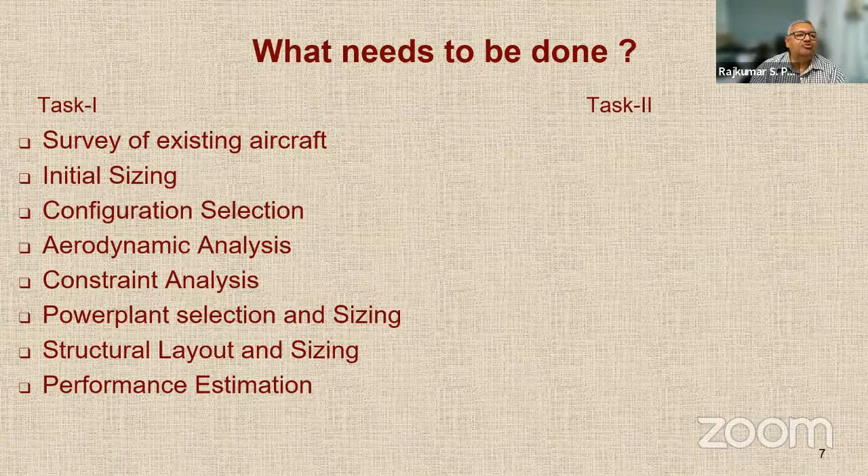After this, there will be a filtration round. Your reports will be evaluated by a team of experts so that only the very serious and committed teams can continue. They will then be asked to do task number 2, which is part of conceptual design but in much more detail. We want you to look at the propulsion system in more detail because this is a very specialized design. We want you to look at the structural design. Important things are cabin design and looking at the communication system. All these things are already mentioned in the problem statement, but we have just tried to put it into 2 tasks here.

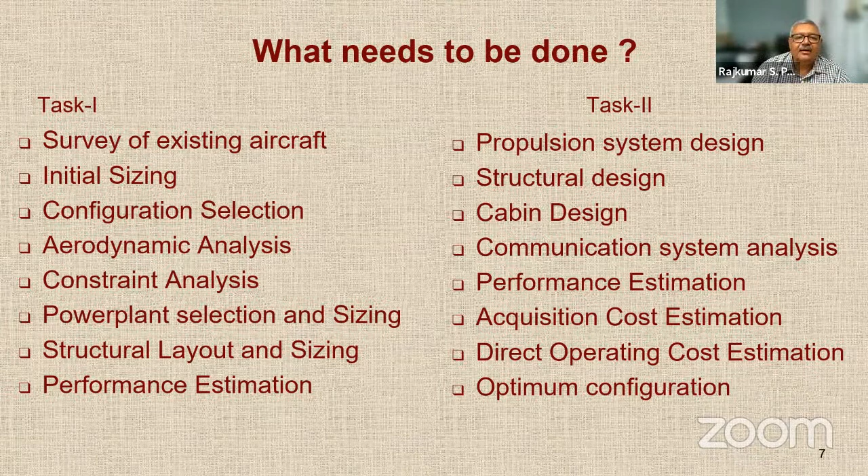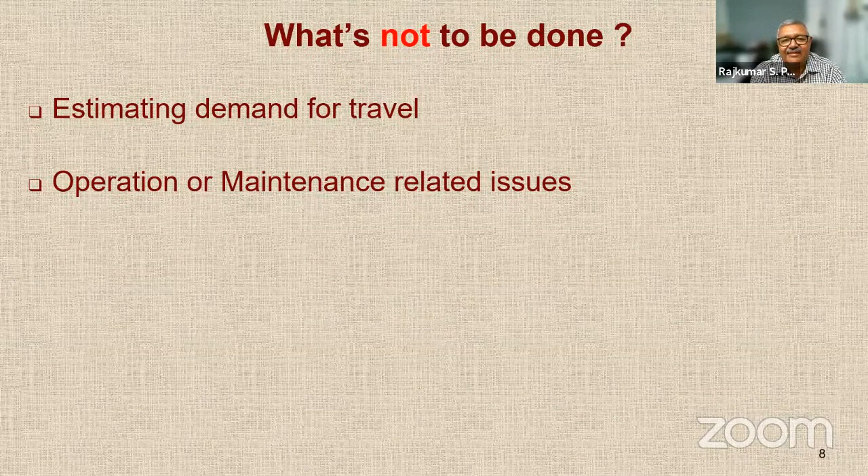Now it's also important to know what is not expected to be done, because if you do this you are going to just waste your energy and time, and you will not get any credit for that in our evaluation. For example, estimating the demand for this particular requirement, issues related to operation or maintenance, discussing maintenance cost, maintenance procedure, etc., or what operational scenarios you will operate in. Scenarios you might include, but operational details are not needed. Then what kind of profit or loss will be made by this particular service, what is the indirect operating cost — all these things are not expected to be done by you.

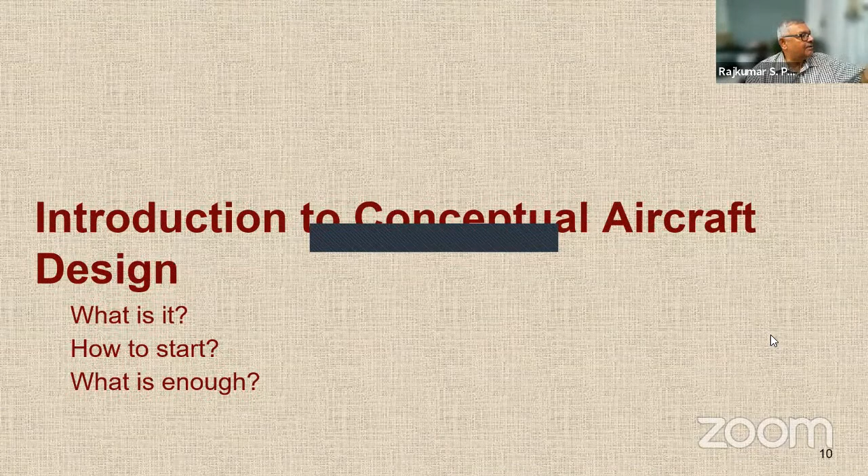Okay, I'm going to talk to you very briefly about aircraft conceptual design, what it is, how to start it, and what is enough for it.

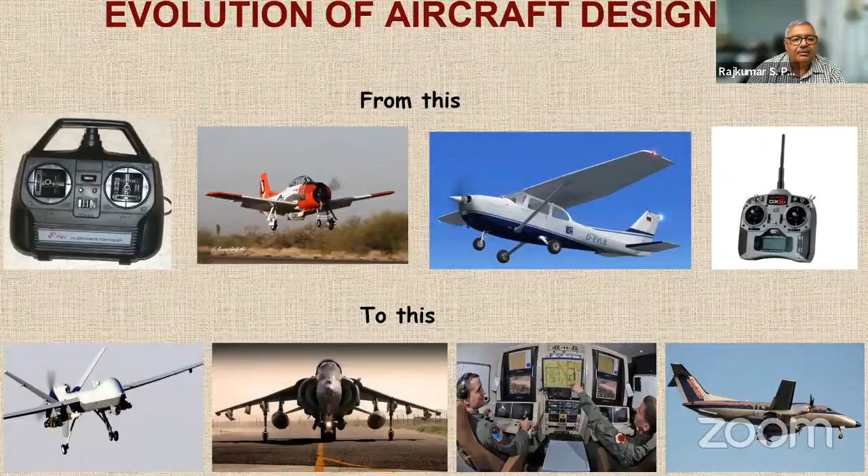What is aircraft design essentially? Can somebody tell me? Anybody in the audience can speak out. What exactly is aircraft design? What do you think? And when I say aircraft design, I actually mean mainly conceptual design. But what do you think it is? Anybody?

So guys, let us not make it like an aircraft which comes to meet the... so the aircraft which meets the mission requirements. Everybody should just say their name before they speak. Norman, of course, I know you. So what did you say, Norman? Once again, loudly. Aircraft design process leads to the aircraft which fulfill the mission requirements. That's all. Anything that meets the mission requirement is a good aircraft design.

No, that is not the required aircraft. Just meeting the mission requirements is not enough. You have to meet the customer specs and airworthiness requirements. And also it should be something which is less expensive and easy to produce in large quantities. That is inherent in aircraft design. Although in this particular problem, we are not asking you how many quantities you have to produce. We are not asking you. But in general, it should also be easy to produce and less expensive.

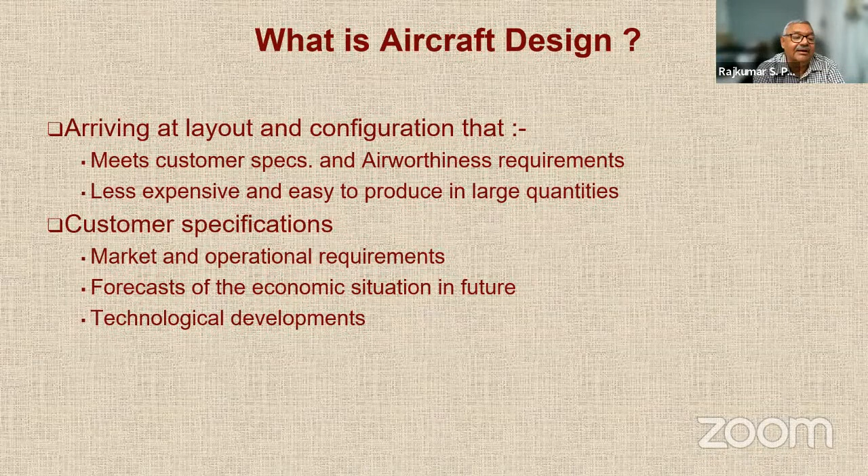But there are also some airworthiness requirements which have to be inherently fulfilled. So we will not be listing those requirements. We expect you to yourself decide what requirements from the airworthiness table are going to be required and inherently show that you are meeting those or complying with those requirements. So please note, in the problem statement, we have only given the customer specifications. We have not specified the airworthiness requirements proactively or exactly. You have to figure out then yourself.

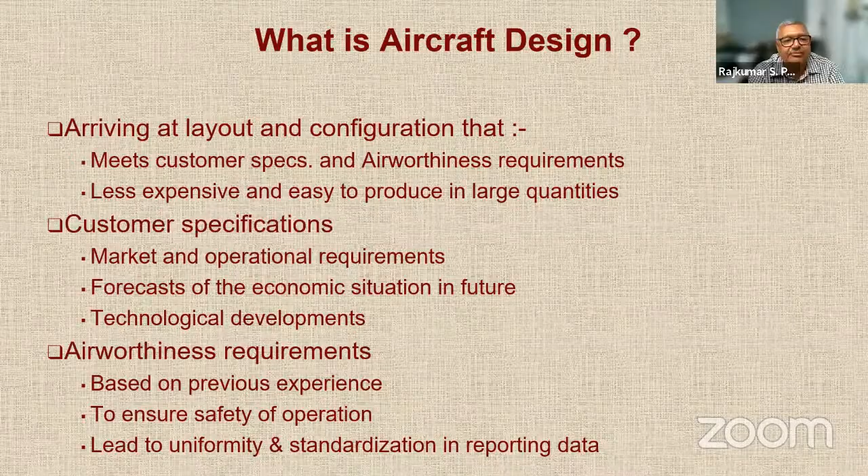Aircraft design is done normally in some phases. The first phase is called the conceptual design, in which the main aim is to ensure that it is feasible and also to identify which requirements are most important that drive the design. We are requested to carry out what is called initial sizing and the configuration and layout, and also estimate the component masses, performance, and cost.

Conceptual design stops when you freeze the configuration and then start looking at some detailed numbers in the preliminary design. There you are ensuring that the design can actually be realized. You go to the nitty-gritty, you look at the mechanical and structural concepts to be developed, and you develop detailed test and analytical database using wind tunnel testing, detailed CFD analysis, or any other system-based tests.

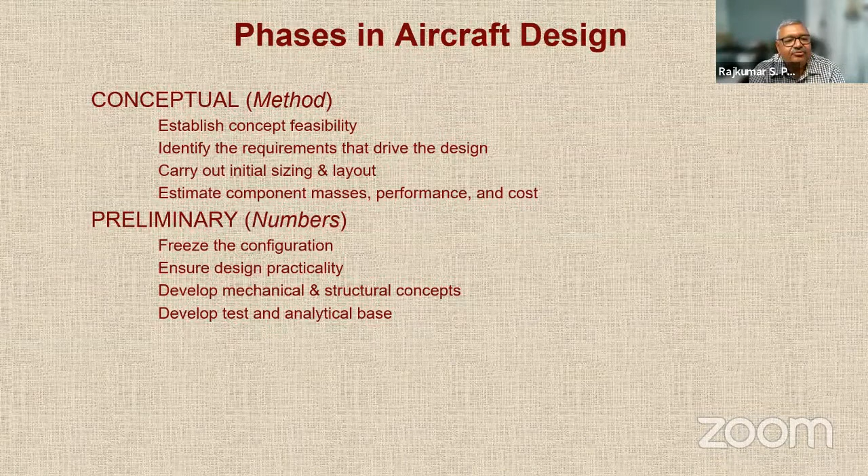Once you do that, you are now ready for fabrication. So you go for detailed design, where you do the nuts and bolts of design. You design individual components: wing, fuselage, tail, landing gear, instrumentation system, etc. You develop the process to fabricate this aircraft in large numbers. You test all the major items and you finalize the weight and performance estimates.

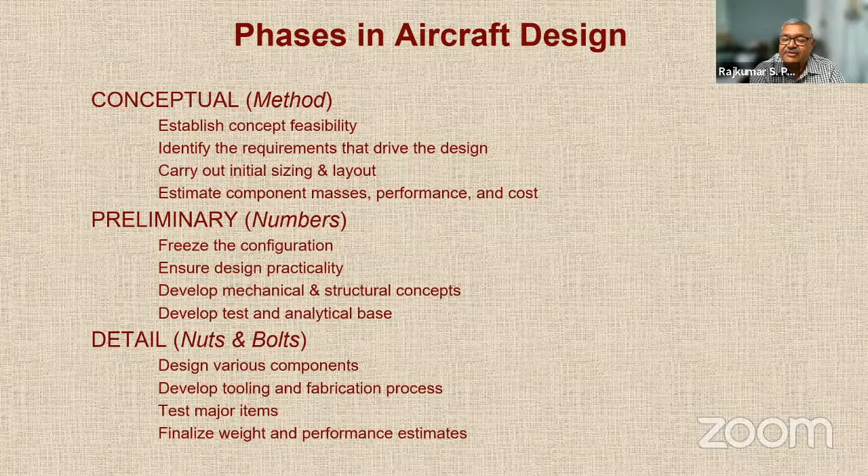So now I have a question to all of you. What is required for NACDeC-VI problem statement addressing? People can unmute themselves, mention their name, and tell us what do you think is needed. Yes, I'm Tanisha, and I think required for NACDeC-VI...

Sorry, what is required? Conceptual. Conceptual design. Yes. Okay. Right. Anybody else would like to differ with the opinion of Tanisha?

All of you, I'm sure, have read the problem statement, so you know how much detail we have to go to. Conceptual design and sizing. So where do you come to the word sizing? It's a part of conceptual design, right? So tell me, conceptual and preliminary and detail, or only conceptual - tell me among these three how much detail you're expected to go in this competition.

Anybody else can answer? So Namanuddin this side. Yeah, conceptual design in task 1 and preliminary in task 2. Okay, anybody else?

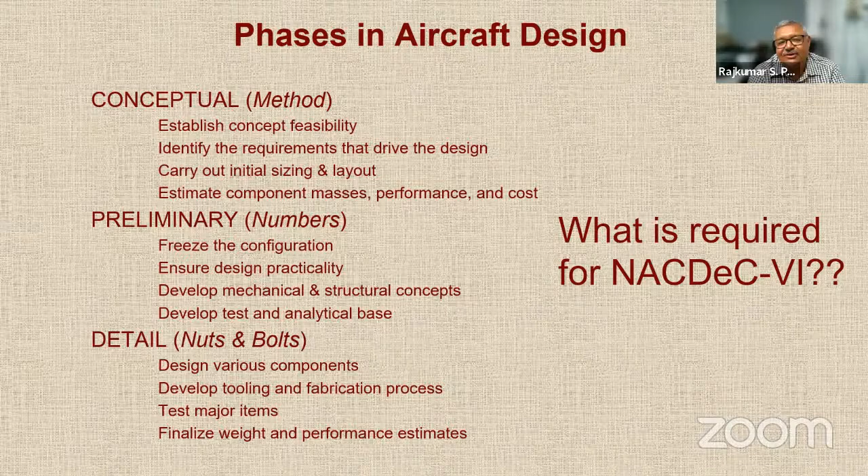This should be considered as part of the aircraft design, conceptual design. You don't need to do preliminary design in this particular competition. One simple reason is the name of the competition itself is National Aircraft Conceptual Design Competition. All the activities listed in that problem statement, you may think they constitute preliminary design, but no, they are all part of only conceptual design. It is just that we want you to go into more detail.

We want you to do a more thorough conceptual design. So we have made the problem statement in two tasks, and these two tasks are essentially coming under the same idea of conceptual design, but you will not be expected to do preliminary design in this competition. So it is very important for you to realize that you are not going to work on anything beyond conceptual design. Is it clear? Yes, sir. Okay, great.

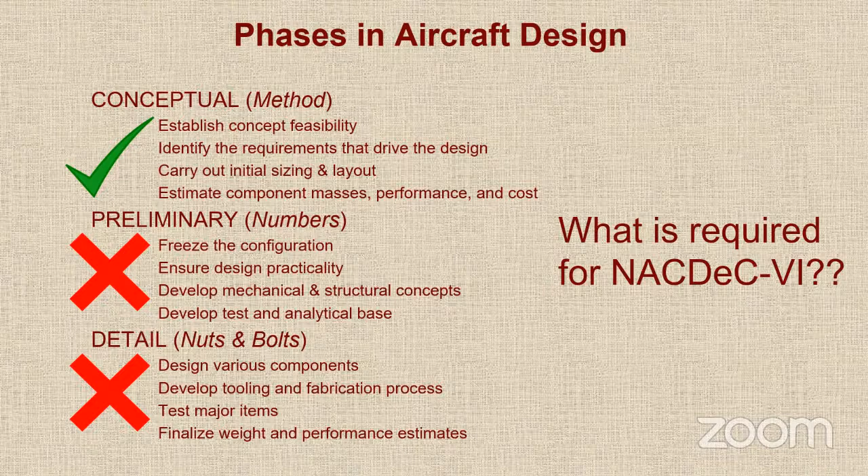Let's go ahead. So the first aspect in aircraft conceptual design is initial sizing. In initial sizing, we have to estimate the takeoff gross weight of the aircraft at the beginning of the mission profile for which you are designing it. That is the task of initial sizing.

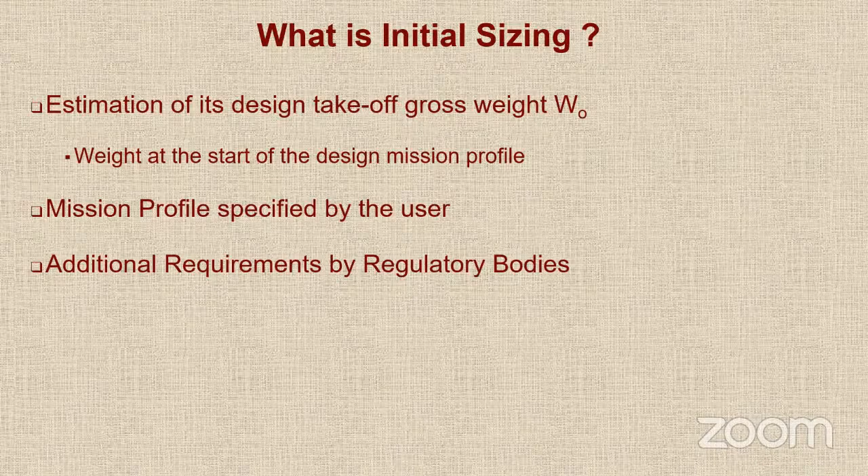This is specified by the user. We have already given you a mission profile in a way. We have given you the requirements, and those requirements can be used by you to create the mission profile. As I mentioned, there are some requirements you have to consider by the regulatory bodies. The objectives of this exercise are: first, by doing initial sizing, you get to know which requirements are most important, which are driving the design, and also you can get a first estimate, a gross first estimate of the gross weight. That's all the output of initial sizing.

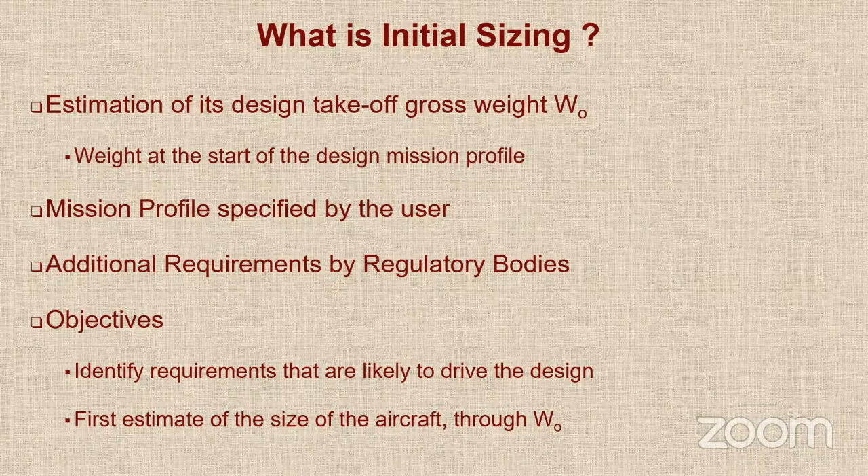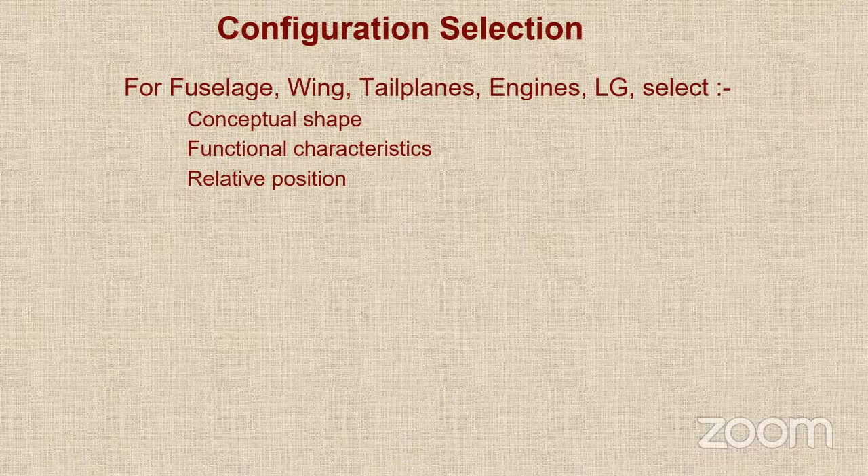Then the next activity is configuration selection, for which you have to look at the conceptual shape, the functional characteristics, and the position of various components of the aircraft, whether to have a wing or no wing, whether to have a tailplane or no tailplane, what kind of tailplane, what kind of wing, are you going to put rotor, propeller, or wing—all that decisions. These are some of the aspects which drive the configuration selection.

Mainly it is the functional requirements and safety and reliability. But many times, depending on the type of propulsion system you are forced to use, depending on the technology that is available, you have to go accordingly. And sometimes you also go by history, style, and passenger appeal, although it may not be that applicable in this case, but in the broad sense it does matter. You look at what people have done in the past and try to draw some inspiration from them.

Remember that as a team, you cannot say that we have decided one configuration right in the beginning and we are going to do it. You should definitely have a few configurations in your mind which will be investigated by team members, either in a group fashion or individually. Finally, you have to give reasoning that we have abandoned concept A, B, and C, and we have kept concept D, or it could be more. But if you say we began with this configuration right from the beginning, that means you have not done configuration evaluation at all, and that will go against you. So we want you to look at a few configurations and then choose one.

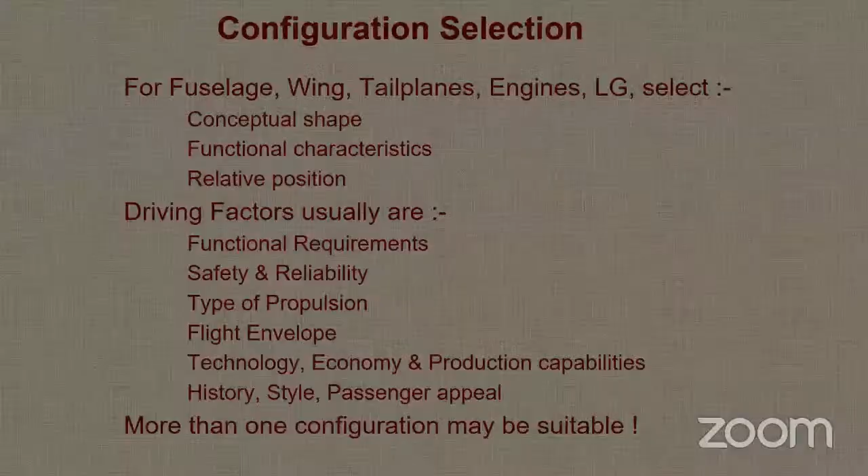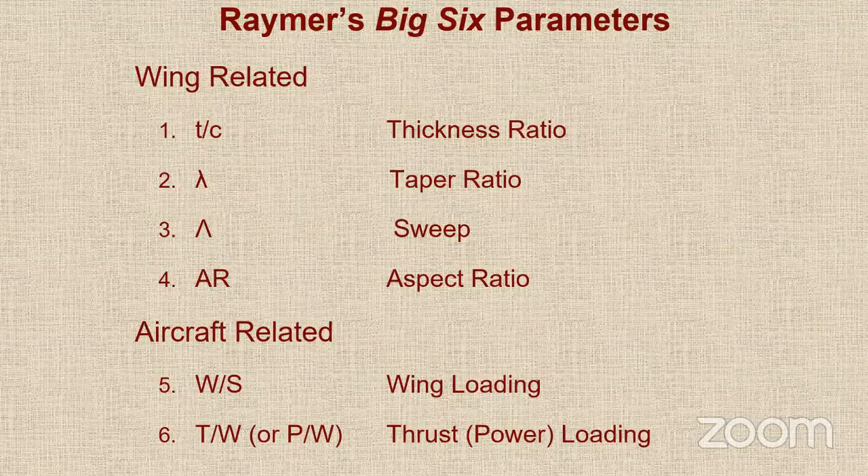The importance of the two parameters, wing loading and thrust loading, is that they appear in many performance equations. For example, many of these may not be relevant to you, but if they are relevant, then W by S and T by W are going to be used for both.

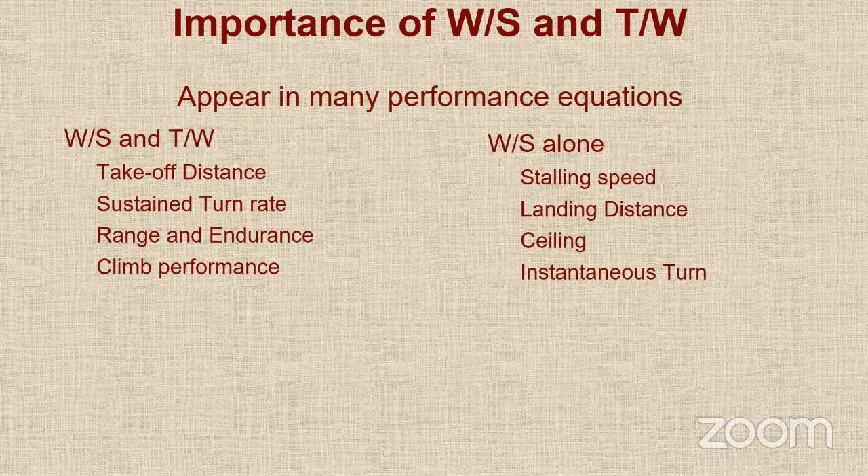Then there are some requirements which will be driven only by wing loading, and there are some requirements which are driven by both of them.

Any questions you have regarding the aircraft design process before we go ahead quickly?

We'll go ahead then. Now we come to air ambulance vehicles, the one which you are going to look at for the next several months. If you look at the literature available online, you will find that there are many companies which have tried to address this problem of air ambulance.

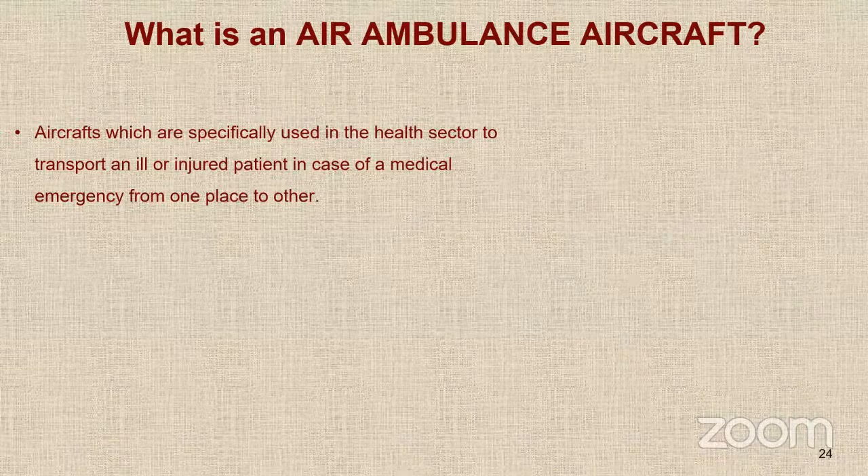Basically, this is an aircraft which is used in the health sector, and our aim is to transport an ill or injured patient from one place to the other. The patient could be under the civilian environment or in the defense requirement, it doesn't matter. So what are the benefits? The faster you reach a person, the better is the chance of survival. 10 minutes, 15 minutes is considered the golden period after an accident or incident.

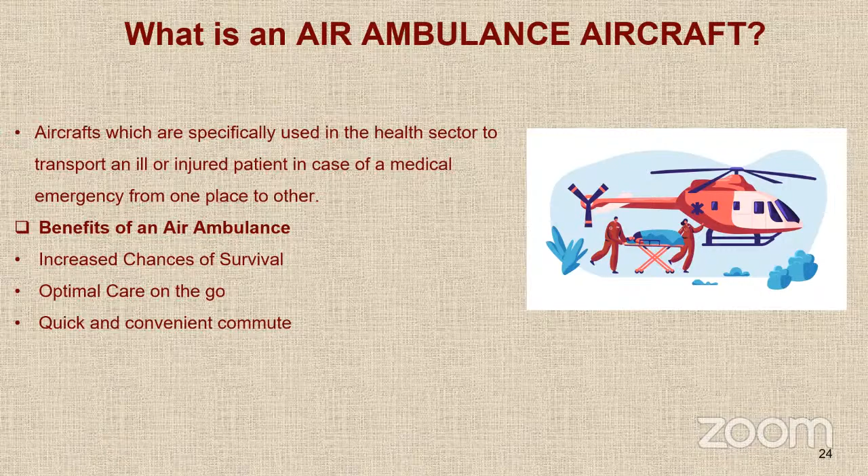Then on the go, you can give some optimal care. There will be one paramedic on board who will try to look at the important parameters of the person, give some immediate first aid, etc. We don't want people to travel by conventional modes of ambulance on the ground because you can get stuck in traffic, as you all know. So we want to give you a quick commute within the city or in a remote area. It will give a fast and wide coverage.

Now, we'll give you an example of a helicopter which has been very popularly used for air ambulance. Remember, this competition is not limited to only helicopter. We are not saying that you should design a helicopter, but we'll try to show you a small video.

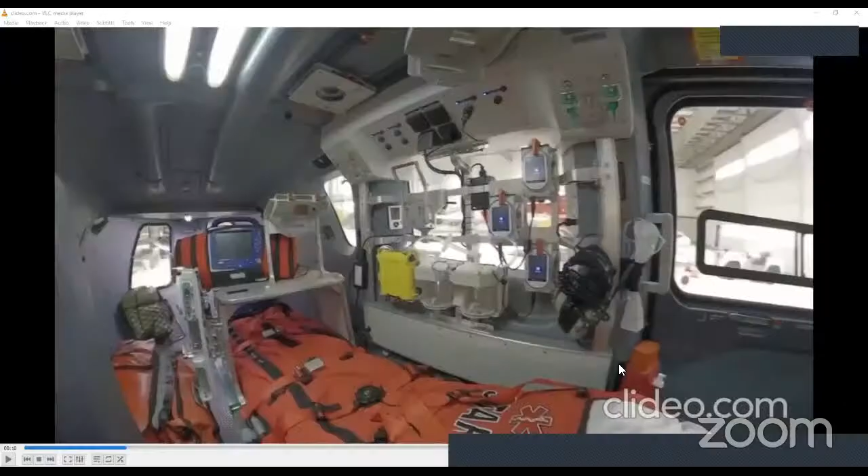As you can see, we have a very spacious cabin, which is a custom installation by Aerolite, as well as leading edge, future-proof medical equipment. I can't emphasize enough how much we appreciate the support of our allies in allowing us to do this and care for these critical patients in the back. In fact, I just finished transporting a patient on this very stretcher, and they had a good outcome because of the ability for me to get to that patient and truly provide the care they required.

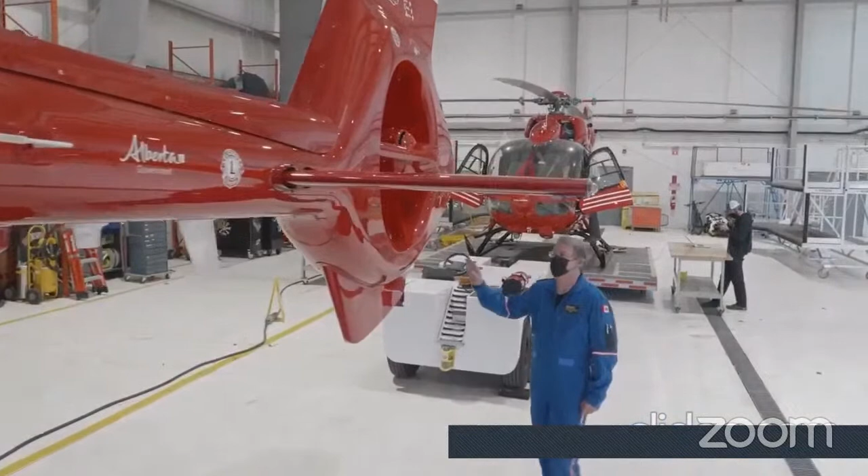So let's head to the tail of the aircraft, and I think John wants to talk about a few things there. One of the new modern features of the H145 is what's called the fenestron. Instead of a conventional tail rotor, there's actually a tail rotor inside this shrouded environment here, which increases safety when we're operating around the back of the aircraft.

But the aircraft's still incorporated with the same clamshell style doors. As you can see when I open them up, they're huge. They allow us excellent access to the back of the aircraft for loading and unloading the patient, as well as our equipment that's secured over on the side.

I can show you how the stretcher works here. It's a single person, no lift stretcher. And what this does is it allows us to safely transition the patient out of the helicopter and into the receiving hospital. They might be hooked up to a ventilator, monitoring equipment, blood tubing, multiple infusions, and that's all secure.

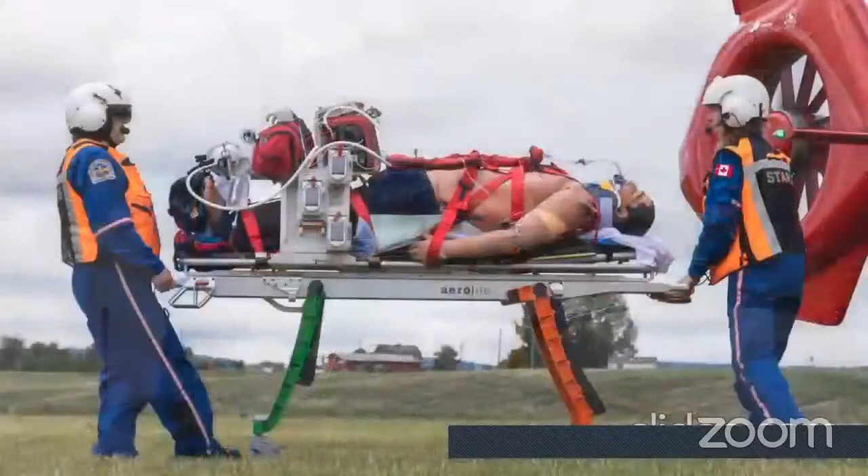So this is one example, just one example of a dedicated vehicle. Okay, but this is a helicopter. Now, what is the problem in using a helicopter for this particular mission? Just a helicopter? Why not design just a helicopter? It has a very large size and a great downwash, so difficulty in landing and difficulty in using in every location where it is needed. No, but helicopters are much more popular than any other aircraft because their selling point is they can land on helipads, they can land on grounds and fields.

The thrust vector of the helicopter is not forward. In cruise conditions, we will need better aerodynamic efficiency, so the power consumption for a helicopter will be much more than the aircraft. The speed at which you are supposed to fly is quite high. Helicopters do fly at that speed, but they are very, very expensive. Correct? Right? They are very expensive.

Also, a helicopter is very difficult to maintain because you have the rotor that does everything - it does the forward motion, it gives the lift also. So it becomes a very complicated mechanism. You have a swash plate type of mechanism, etc. So helicopters suffer from very high operating cost, high vibration levels. They also have much more complicated powertrain because you have to connect the main rotor to the tail rotor in unison, etc. So these are some of the reasons why helicopters can be limiting.

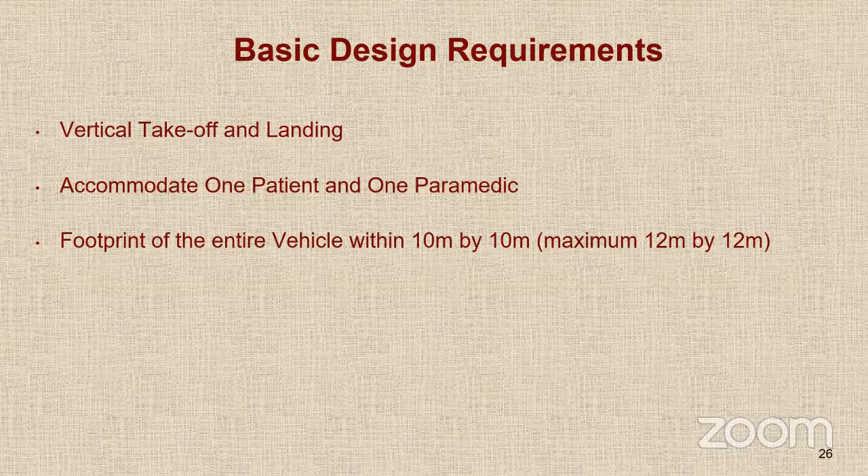Okay, we should operate it in India, so you have to look at ISA plus 15 degrees centigrade conditions for operation. Don't work under ISA conditions. It should be fully autonomous with no onboard flight crew. This is how it is mainly different from a conventional helicopter.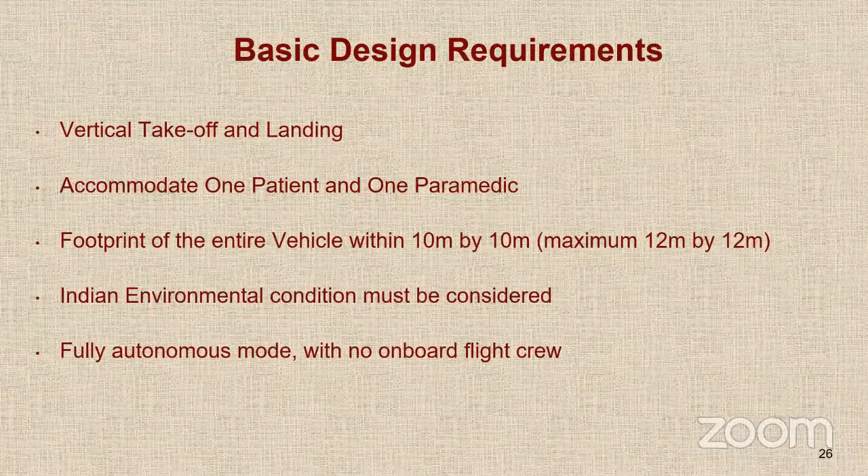Regarding autonomous mode calculations, we are expecting that only in the second stage, some information there, not necessarily much information in the first stage. These are the mission requirements which all of you are aware of.

We are assuming that the total weight of the passenger, the patient, and the paramedic is 170 kg. We want it to travel 100 kilometers at 120 kilometers per hour cruise speed. The passenger cabin volume should be at least 9 cubic meters. Minimum requirement for length, breadth, and height is given; you can have it more than this, that is better, but not less than this. There is also a list of equipment available in the problem statement.

Now, yes please, somebody wants to ask something. Krishnakant here. I had a question about range. It's mentioned 100 kilometers. So is 100 kilometers till the patient, or the whole mission, from hospital to the patient and back? What do you think?

It should be till the patient. Agreed, till the patient, from the hospital to the patient. We want to cover a radius of 100 kilometers. Any passenger within 100 kilometers range from the hospital should be picked up. Good question, thank you sir.

Any other query regarding the mission requirements? So sir, is it 50 kilometers one way? No, it should go from hospital to patient, then patient to hospital. No, it is 100 kilometers one way. Just now I clarified that we want to pick up any patient within 100 kilometer radius.

So it is not fixed at the location where the patient is. We have to operate our vehicle from any of the hospitals, then go to the patient, then count the distance as 100 kilometers from patient to hospital. Is that the case? Yes.

But what about the distance we cover from hospital to patient? That is 100 kilometers max. If your patient is at 10 kilometers, you have spare capacity. You should be able to pick up anybody from a hospital which is 100 kilometers away and bring that person back. So assume the radius of action is 100 kilometers.

Sorry to interrupt, sir, Krishnakant again. About cruise speed also, can you please clarify? Is it max 120 kmph, or should it minimum go by 120 km? There is a meaning of the word cruise speed in aerospace engineering, you don't have to ask me this question. Cruise speed, maximum speed, stalling speed, they all mean something.

So this is not the maximum speed, this is not the stalling speed, this is the cruise speed, design cruise speed. Thank you sir, so continue with that. So is this fixed? You are defining 120, so we have to take it as 120? We cannot exceed or go beyond in cruise?

When you have a cruise speed of 120 kilometers per hour, it doesn't mean that is a maximum speed. So we can go above it, right? Yes, but you are not expected to. When you go above it, you are going to use a bigger power plant. You should have a reason for having a speed higher than what is required. Okay sir, got it.

Any other question? Hello sir, Akanksha on this side. The cabin dimensions and the cabin volume given, are those minimum, can we exceed that? Yes, please, you can exceed this. Below this is disqualified, above this is welcome. Okay, thank you.

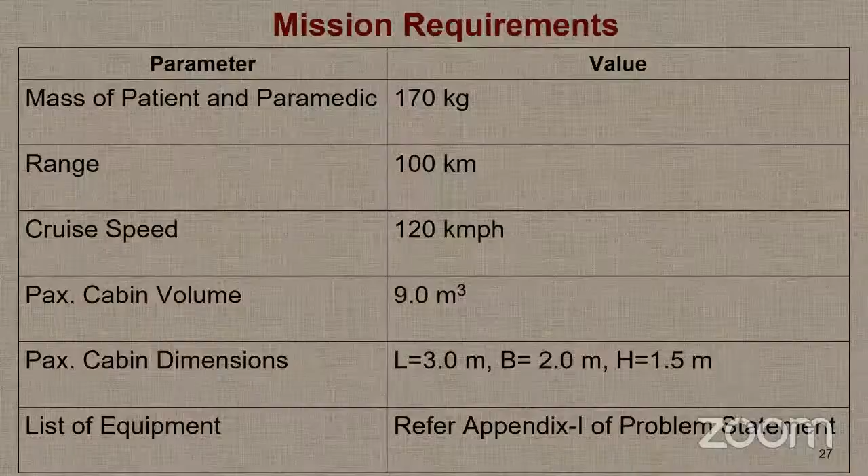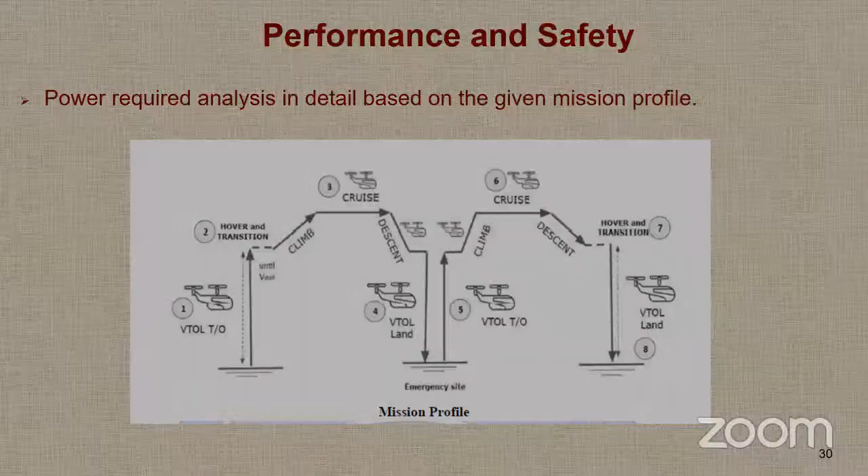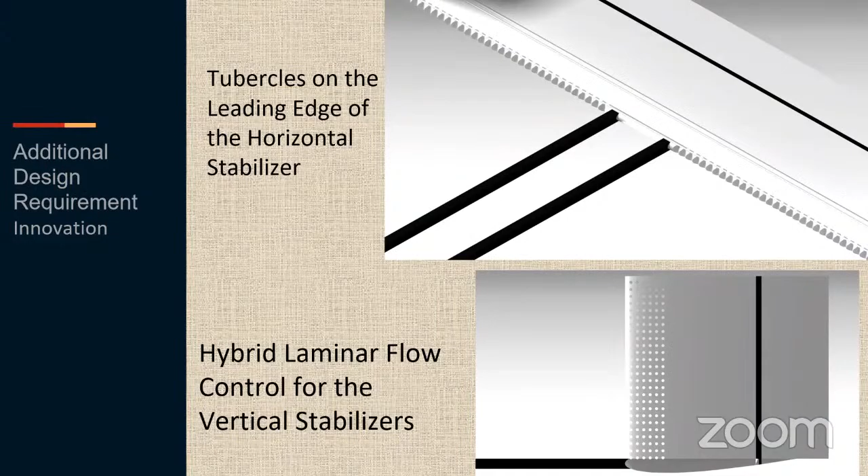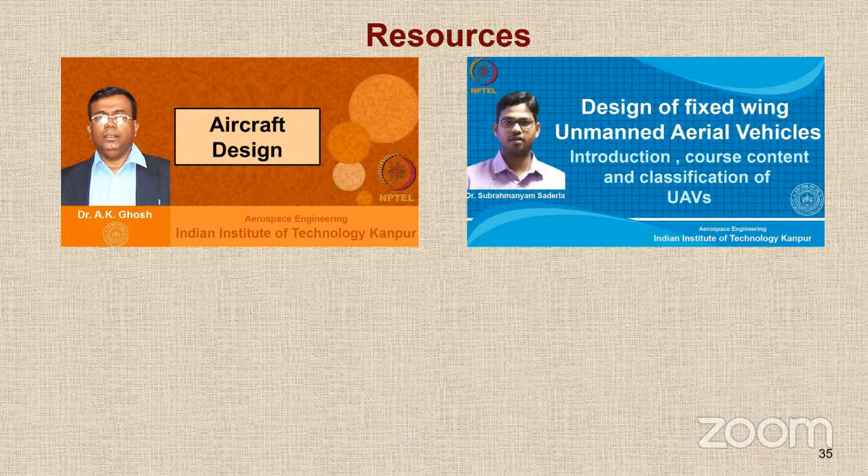For this exercise, you have many resources available, apart from standard aircraft conceptual design textbooks like Raymer, Roskam, Nicolai, or Professor John Fielding. You also have free online courses - one by Professor A.K. Ghosh of IIT Kanpur on aircraft design on NPTEL, a dedicated two-level course by Dr. Subrahmanyam Saderla of IIT Kanpur on fixed wing unmanned aerial vehicles, and a course I teach, though mine focuses mainly on transport and military aircraft. You may not apply the knowledge directly, but you'll get the design philosophy and standard procedure.

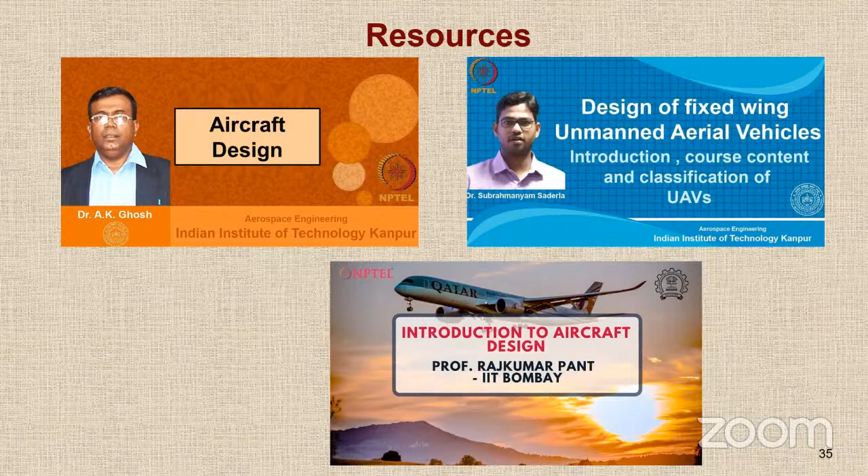You can get recorded lectures of these courses. They are not running now - they've already finished. The aircraft design course recently concluded, with examinations around the 30th of this month, and results are already out. But the videos are still available on the NPTEL website.

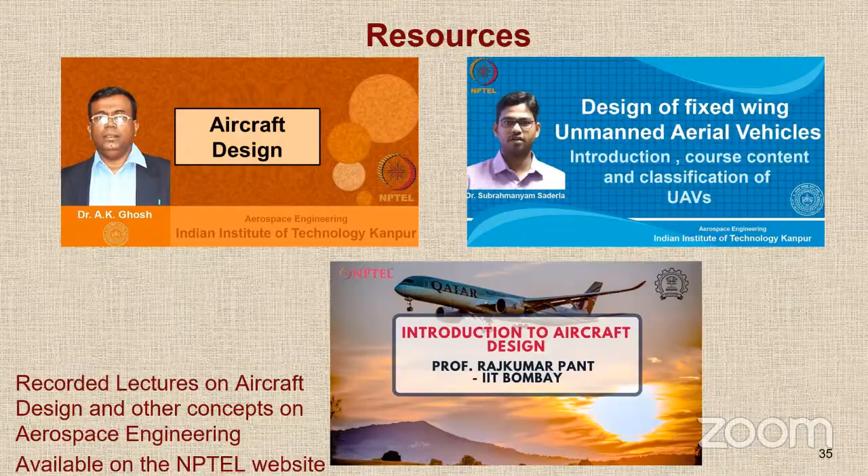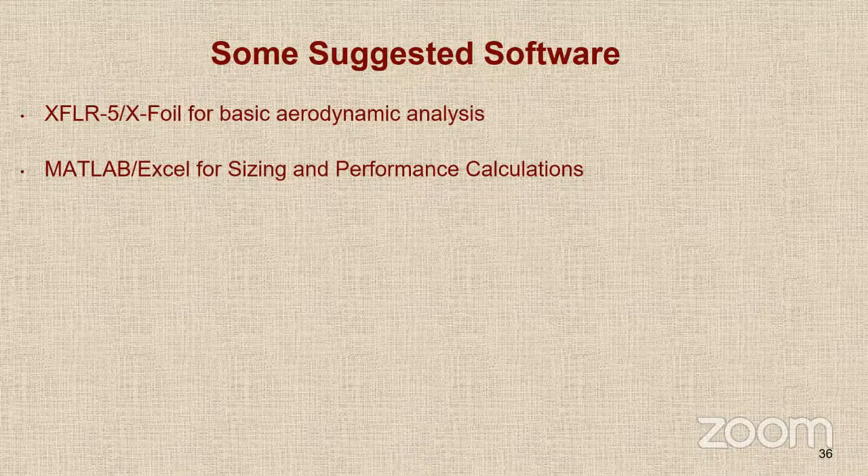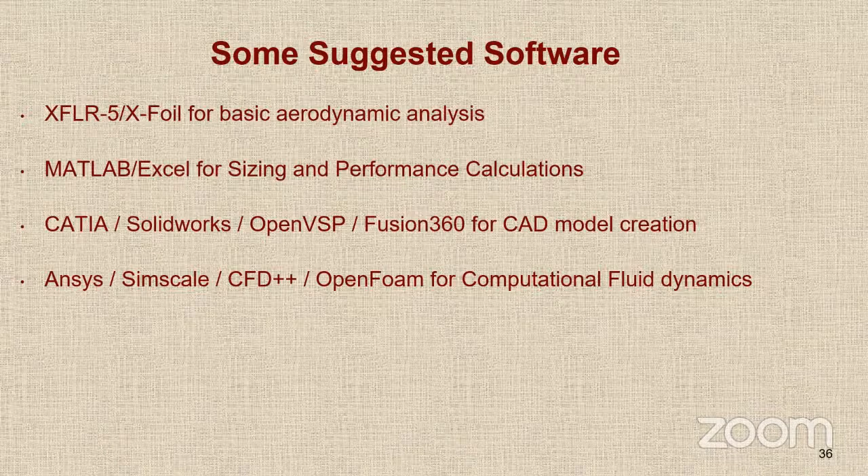We would also recommend some software. You could use Xfoil or XFLR5 for basic aerodynamic analysis. Many people use MATLAB or Excel for sizing and performance calculations. CATIA, SolidWorks, OpenVSP, and Fusion are good for CAD model creation, but I strongly recommend OpenVSP. For CFD, OpenFOAM is most recommended since it's free, but ANSYS, SimScale, and CFD++ are other popular packages. It will be nice if you document your report in LaTeX, an open source DTP software, but you may also use MS Word.

The important thing is that whatever software you use should be licensed to your institution or to you. We are not liable for any damages if you use a pirated version, and if we find out you used one, we might disqualify your team. This is because when you registered for NACDeC, your institute head gave an undertaking that open source or licensed software will be provided to the students.

Access to licensed software will be given to the students. Please stay away from pirated software. We are not recommending any of these; we are just saying preferably use open source. For example, there is an open source version of MATLAB called Scilab, available under the FOSSEE program, a free and open software program. LaTeX is free, OpenFOAM is free, OpenVSP is free, and I believe Xfoil and XFLR5 are also free. So use them.

Any questions anybody has? Later on, don't come to me and say, can we use a student version of this software? You can, if it is allowed for you to use, because if you are a student, you can definitely use the student version, but be careful that you don't break any licensing requirements. So you can consult that company and take a call.

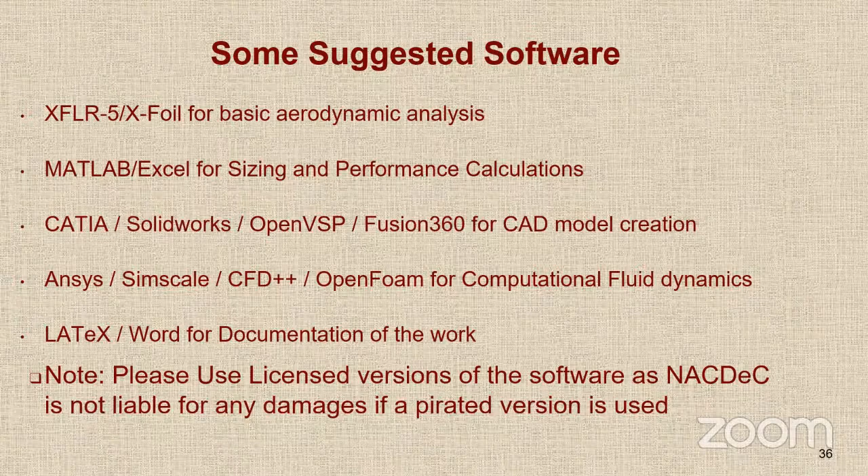Sir, could you elaborate on the timeline of activities? Just a chart which mentions that during this time we have our exams, so we'll not be doing anything, and during that time we are busy with something else. This is how we will do the work.

So you have the NAC DeC deadlines in front of you. How will you meet those deadlines? What will be your sequence of activities? Some overlap, some lean periods, etc., you should mention, so that we know you are mentally aware that you have to spend so much time in December, so much time in January, etc. You should be able to meet the requirements within the NAC DeC deadlines.

Sir, can we change the number of pages, like for the survey of existing aircraft it's given as 5 and configuration selection is given as 5. So can we use survey of existing as 7 and configuration selection as 3, with total number still being 20? Will that be allowed?

These are the certificates that we gave in the NACDeC competition earlier, in one of the earlier versions, just to tell you that there will be a certificate of first, second, third prize for the teams which come first, second, third out of the 5 teams. There will be a participation certificate for all teams shortlisted for the final round, and a certificate of appreciation for all the mentors.

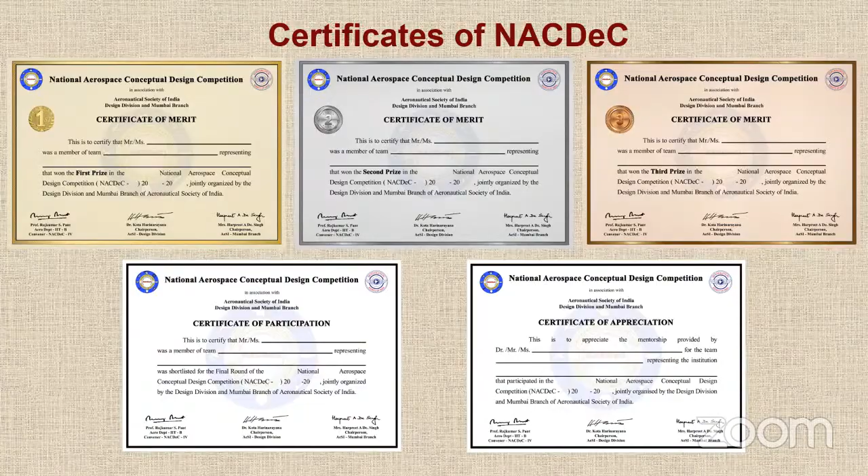Now, these are the 2 people: Pranav, sitting on my right hand side, and Prachi, who lives in Thane. They are the ones who will do most of the coordination work. You all know them, since they have already been in touch with you and sent you the problem statement, etc.

And then we have a couple of volunteers, Yukesh and Ajit Kumar Shetri, who are going to help us. They have worked on this problem last year, and are interested to help us out. We are very thankful to both volunteers for helping us with popularizing this competition and reaching out to you. They are not taking part in the competition, although they are students.

In the synopsis report, is it necessary to add rough 3D CAD models of the configuration selected? Listen, in the pre-synopsis you cannot select the configuration because you have not done the design. The design will be done by you only in the first stage and second stage, task 1 and task 2. In the pre-synopsis, you will just tell us these are the configurations which we think are promising.

But you have to understand one thing: the name synopsis means summary, and pre-synopsis is not the end. Synopsis is just to tell us that you are serious and you know what you are getting into. Sure, so thank you.